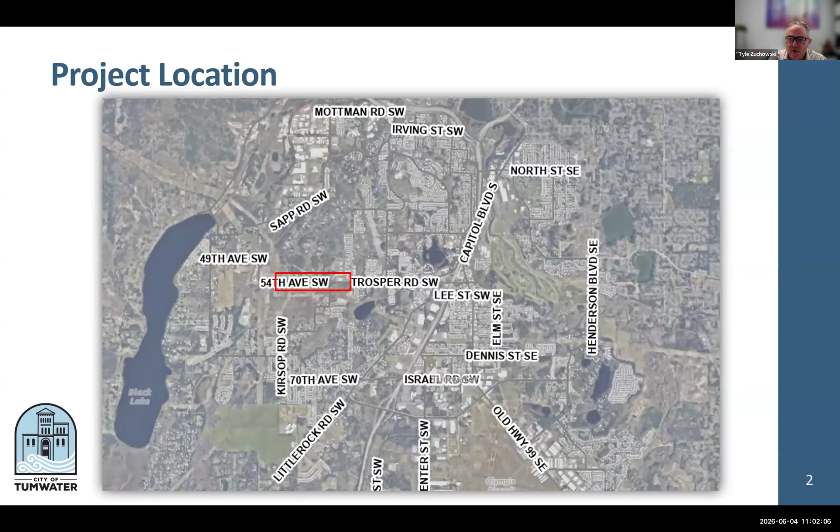I'll provide just a quick background on the project. It's located along Trosper Road and 54th. I'll remind you that I presented to the committee back in April seeking authorization from the council to accept the low interest loan in the amount of $5,250,000 from the Department of Ecology. I will note that all that paperwork has been submitted and approved, and the funds are available for that project.

So for the scope of the project, the project would extend the existing sewer line from Lambskin west along Trosper, 54th, and as well as up Joppa Street.

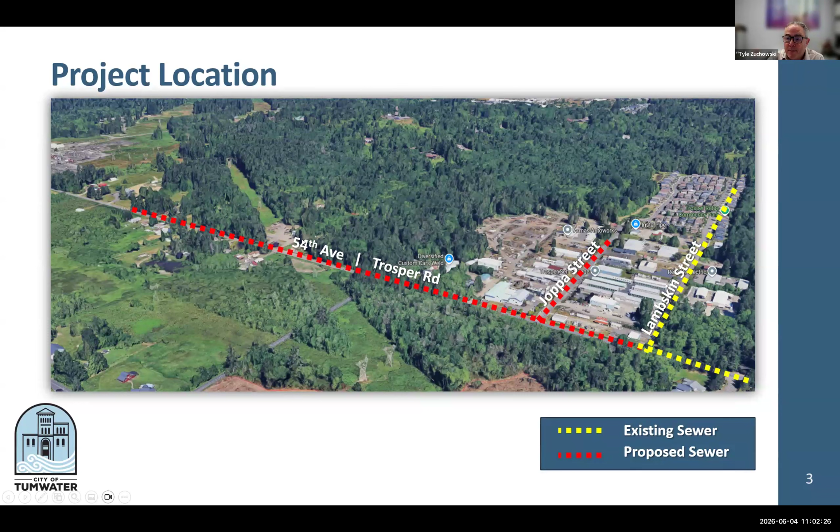And the primary driver for the project is water quality, through previous TMDL or total maximum daily load assessments, there have been water quality concerns identified with elevated levels of fecal coliform and total nitrogen. So we want to protect and improve localized groundwater in that area. We'll also use this project as a case study to help facilitate the development of the program and policies for the septic to sewer conversion program for the city. The council will be brought information as we continue to develop those, and this is used as a case study to help facilitate that process.

And with this particular project, we anticipate that there'll be 32 parcels that will now have the ability or sewer available to them.

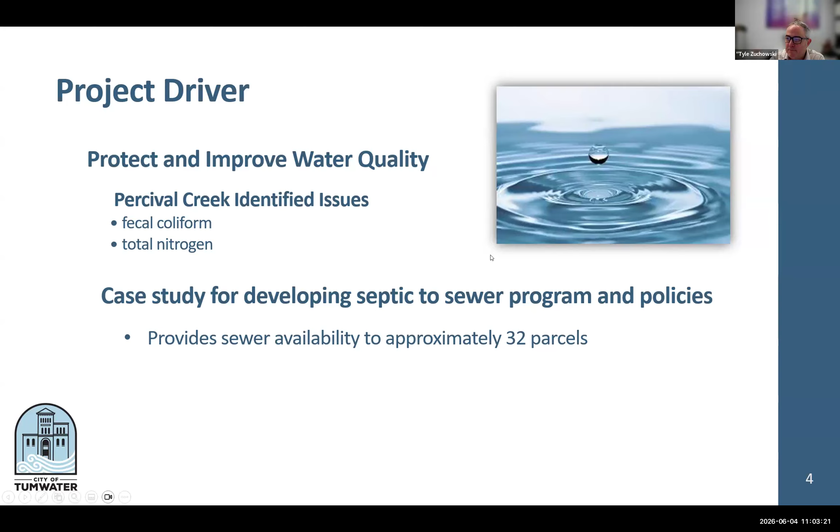So for this effort, we went out for a formal request for qualifications, and we encouraged qualified firms to submit their statement of qualifications addressing: what the firm is, where they're located, what are the primary types of projects they do, who their project manager would be and project team, their specific approach to the proposed project, schedule and availability, team members, and a list of references and previous projects demonstrating their ability to complete the work. We received 7 statements of qualifications from 7 qualified firms.

So we had an internal committee developed, and each member ranked the statements of qualifications based on that criteria. We all got together and discussed that. Ultimately, we selected Gray and Osborne as the most qualified firm. There was consensus with that, so that was great. It was nice to see that we had so many interested parties, so that's helpful moving forward, knowing that we have quite a bank of qualified firms out there.

Gray and Osborne submitted a scope and fee. Transportation and engineering folks did a great job of working with them and negotiating on the fee, identifying potential opportunities to reduce cost. So the tasks include project management, data collection, utility coordination. We'll also do a pre-design report to solidify the scope of work for the project, which will include getting stakeholders together to agree upon what that is. It will also include an updated cost estimate so that we can better understand the total project costs.

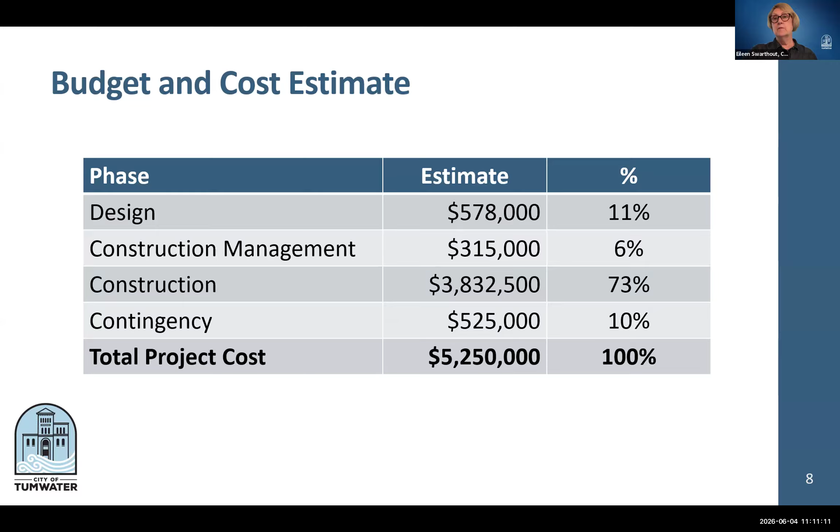Right, okay, I appreciate that. Thank you. The only other question I had was if we could go back to the map that showed where the route is going to go, how far down it goes. Does it go in front of the property that we're having an issue with right now, correct? Or does it?

Depending on which property it abuts, does it go past it? Yes. So are the red dots right, or the yellow dots? If it's the same property on the corner there, that is an existing sanitary sewer system, so there's already sewer at that location. So there's already water and sewer, but those structures aren't connected, correct? Correct. Okay, so that already exists.

So anything in red is what we're building, correct? Correct. Okay, got it. All right, just wanted to confirm.

I just want to point out too that the loan is the project budget. With the pre-design report we'll conduct with Gray and Osborne, that will help identify the extent of the project itself so that we can stay within the budget. So if we don't extend as far west, we'll match the project with the funds that we have available.

But we will get up Joppa and extend along Trosper, you said. Okay, yeah, that's our main goal. Okay, good to know. Thank you.

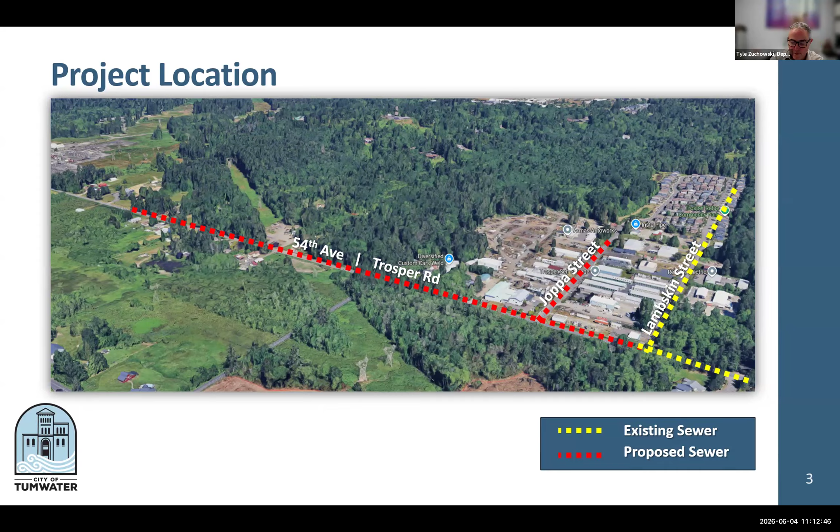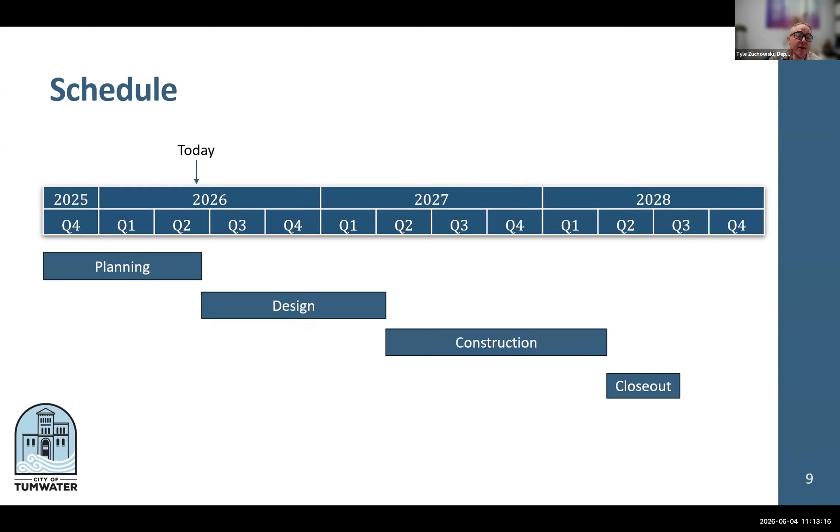All right, so again, hopeful to have this project under construction starting next summer. There are some identified high groundwater areas in there, so the hope is to get some of that work done prior to the winter season. But I think we're on a good pace right now, and look forward and hopeful that the committee is in favor of moving forward with Gray and Osborne.

With that, we would hope the committee would place a professional services contract with Gray and Osborne for the design of the Trosper Sewer Extension Project on the June 16th, 2026 City Council consent calendar with a recommendation to approve. I'll take any additional questions.

Any questions? Councilmember Van Holtz? I don't. In fact, I just got off of a call with the city of Tacoma for a sewer replacement project, so I feel like this is just my day. Okay.

City administrator, my only, not concerned, but just to show the city a picture of our loans. So this 5 million, and to just capture them all somewhere, so it's easily digestible, what it looks like for 15 years, what it looks like for 30 years.

That's a great point, Councilmember Jefferson. We currently don't have any debt, so right now there's nothing to show. But as we start to look at these projects, particularly when we do the financial analysis, full disclosure, we have a debt package we're working on right now that would consider some property acquisitions as well as the city hall facility as well as T2. So that's a debt package we're working on that would include the general fund.

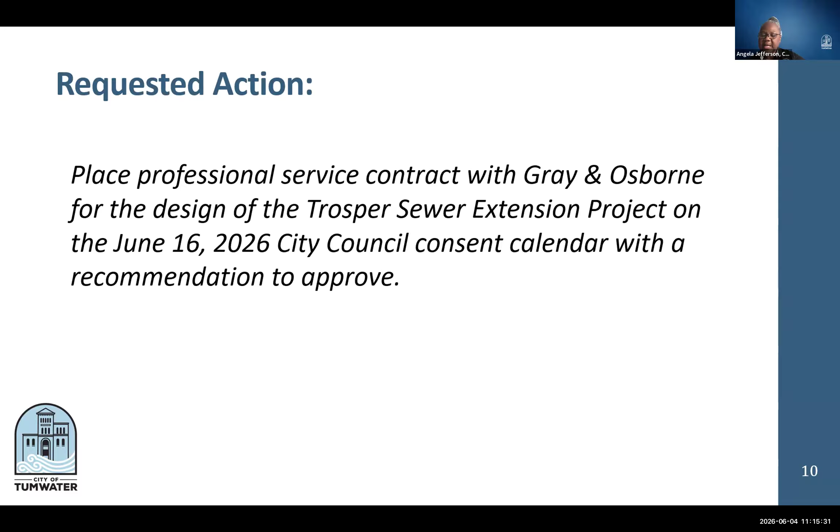Next, let's discuss the service provider agreement amendment number 2 with RH2 Engineering Incorporated for the Southeast Water Reservoir Design Project, Transportation and Engineering Department.

Okay, good morning, can everyone hear me okay? Yes, all right. Can you see the screen? All right, great, thank you. Hey, good morning, Chairperson, members of the council and committee.

My name is Jeff Query, Project Manager, Engineer 3 for the city's Transportation and Engineering Department, and I'm here today to present amendment number 2 for the City of Tumwater's Southeast Reservoir Project. To give you a quick refresher on the project itself, this involves the construction of a new 3 million gallon water reservoir off of 93rd Avenue near the southern city limits. This critical infrastructure will serve the city's 350 pressure zone water distribution system. As you know, Tumwater is growing, and this reservoir will provide vital water capacity for both domestic and commercial use.

So I just got a note passed to me there. There we go. Okay.

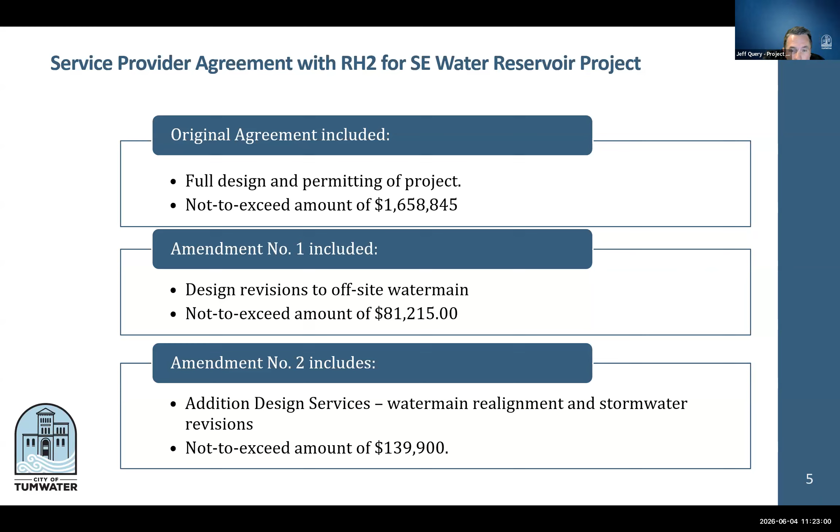So looking ahead, we anticipate completing final designs and having a bid-ready package by the end of this year, December 26, with construction bidding taking place in spring 27 and construction kicking off next summer. So with that, I respectfully request the Public Works Committee place the service provider agreement number 2 with RH2 Engineering for the Southeast Water Reservoir Design Project on the June 16th, 2026 City Council consent calendar with a recommendation to approve and authorize the mayor to sign. I'm happy to open the floor to any questions anyone may have.

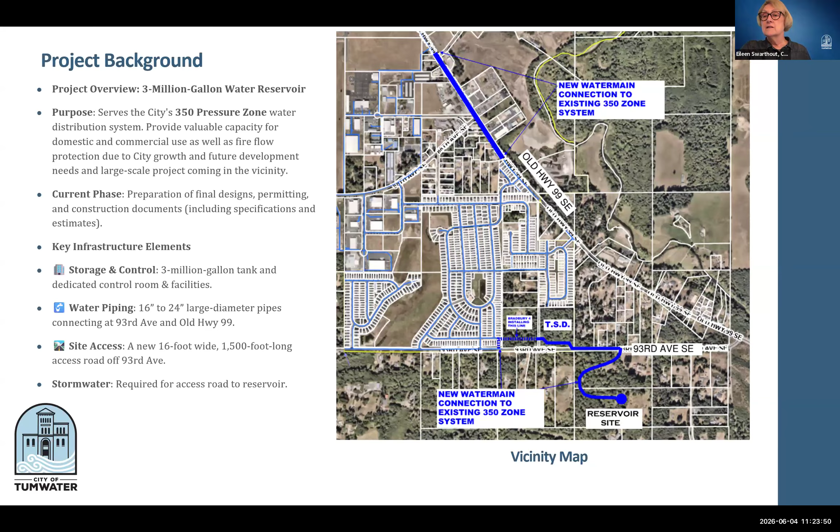Can we go back, Eileen, to that picture, please? And then how about that one too? Okay, so in a nutshell, go back to the main one, the other one you had up before. That one. So instead of going on 93rd on our side of the road, we're going to go on the other side, the Tumwater side, the Tumwater School District side. So we'll be running the line down there.

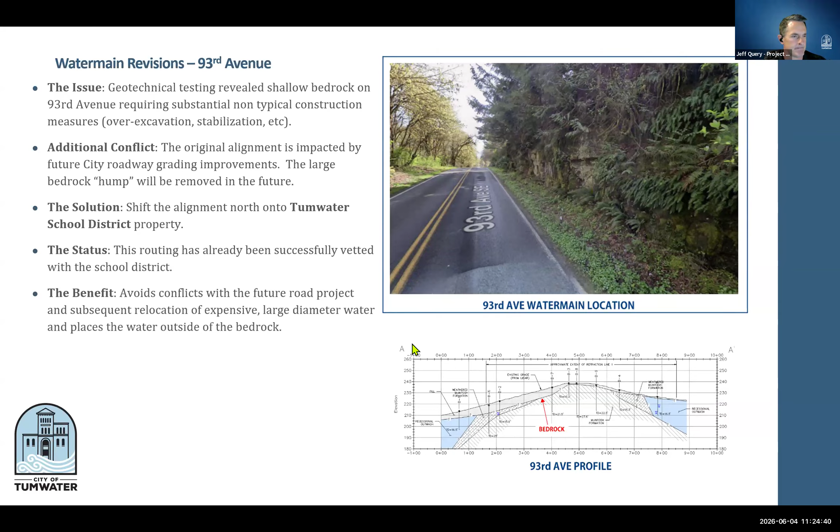That's correct. So I have a couple questions, also about the road we're punching through. We had some concerns before about how long that road is and how many trees need to be taken out. So now I'm wondering about the impact. It looks like you're going to have to do catch basins rather than having it just flow naturally. Is that what they're going to be? Can you go back to that map? So that means even more tree removal. What will that look like? We were really concerned about how much was going to be taken out of there.

So RH2's had their tree surveyor out there. We've identified heritage trees, and we're preserving as many trees as possible on the site. Part of this alignment included preservation of as many trees as possible. This site also sits quite a ways off of the main road, but we do have just the 40-foot easement through private property to get up to our property. So this is kind of the alignment we landed on in order to achieve all the goals.

Yeah, I remember that, having to snake it through the forest. It's just, now that we had our canopy briefing the other day about needing to preserve trees, and you just brought up heritage trees, it makes me realize that heritage trees are tough to replace if we have to remove them. Those are being retained, we aren't touching any of those. I'd be happy to follow up with you separately if you have more detailed questions. I could show you what we have going on in more detail related to trees on this site, Eileen.

Okay, that would be nice, appreciate that. And then the only other thing was flooding that's been off of 93rd before, that whole ditch district and stuff like that - this hopefully alleviates that. Yes, very sensitive for sure. So are you guys taking issues with flooding into account, extensively? Yeah, nothing so far.

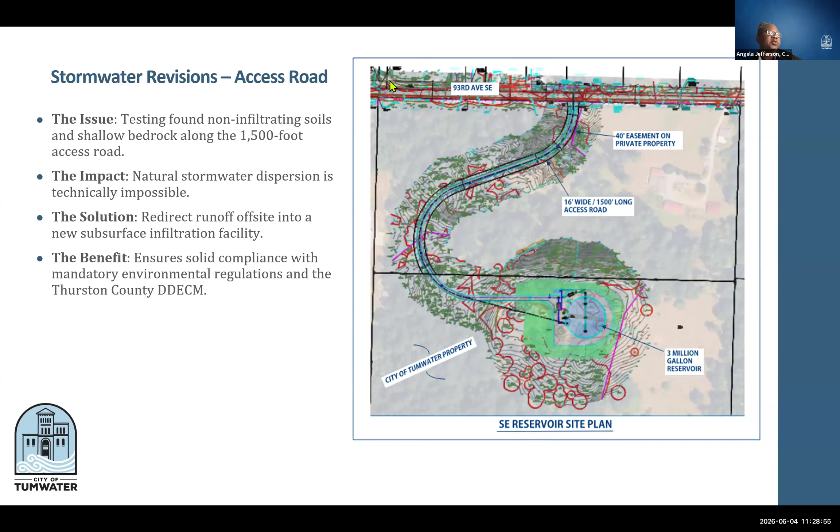Since there are no other questions, we have a recommended action to place the service provider agreement number 2 with RH2 Engineering Incorporated for the Southeast Water Reservoir Design Project on the June 16, 2026 City Council consent calendar, with a recommendation to approve and authorize the mayor to sign.

So move. Is there a second? All in favor say aye. Aye. Motion passes.

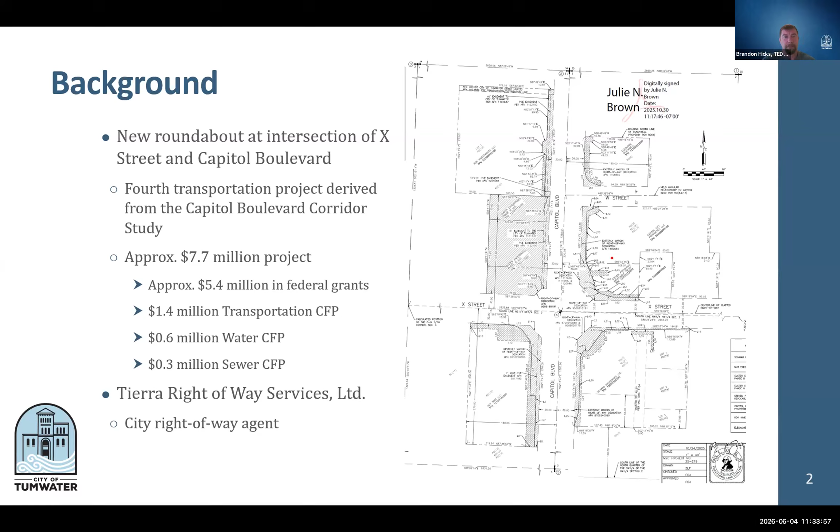For sort of describing why we're at amendment number 3, well, really what this is doing is increasing the current not-to-exceed amount in the consultant agreement from $184,220 up to $226,490.

I have a lot of the reasons, and these aren't even all of them on the screen there. But not wanting to read off every single one, I'd say the most notable struggles to date have been that it's been very difficult to relocate one of the properties in this project.

There is a full relocation of one of the businesses. It's been very difficult because there isn't a lot of market availability. There's been substantial effort for our right-of-way consultant to work with the property owner, and there has been some success—they have actually found and acquired another property.

They're working through some permitting struggles with Thurston County because it's not located in Tumwater. We were first hoping to find them a location in Tumwater, but there wasn't any that really met what they were looking for. They found a site they really like in Thurston County, sort of in that area between Olympia and Lacey where the city limits don't quite meet, off of Martin Way, I think—don't quote me on that.

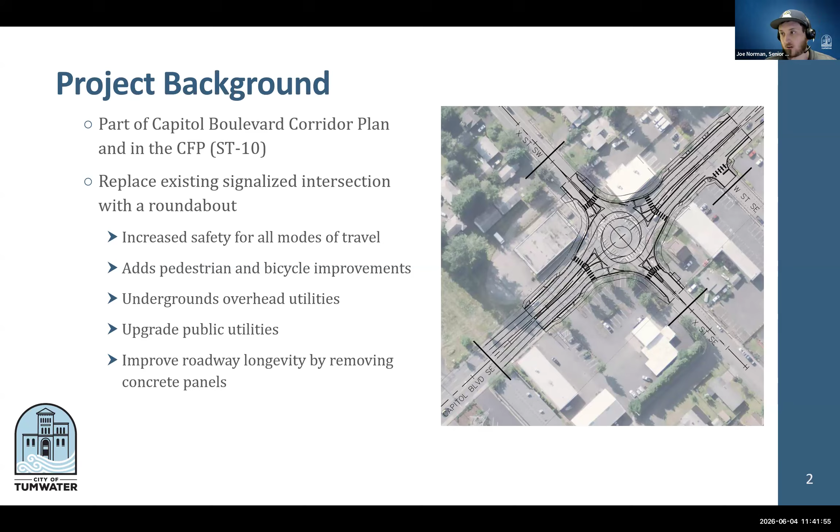We are replacing a signalized intersection with a roundabout, which aims to increase safety for all modes of travel. It'll add additional pedestrian and bicycle improvements. We'll be undergrounding our overhead utilities, upgrading our public utilities—water, sewer, and stormwater systems—and improving our roadway longevity by removing the underground concrete panels.

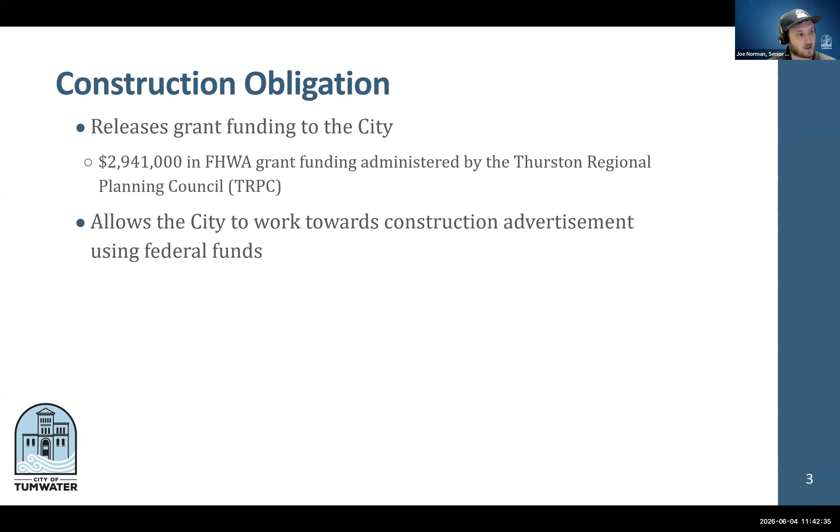The construction obligation portion is paperwork in order to release our grant funds that were administered by the Thurston Regional Planning Council, their FHWA grant funds. We have $2,941,000 that we secured for construction, and getting this construction obligation will allow us to move forward towards construction of the project.

So fiscal notes: our construction estimate is right around $4.9 million currently. The grant funds for the project to date have totaled $5,373,000 for the entire project, and that includes the $2,941,000 we're trying to get released upon acceptance of the construction obligation documents. The remaining funding, Brandon actually had better information than me to share, is from the transportation CFP and the water and sewer funds.

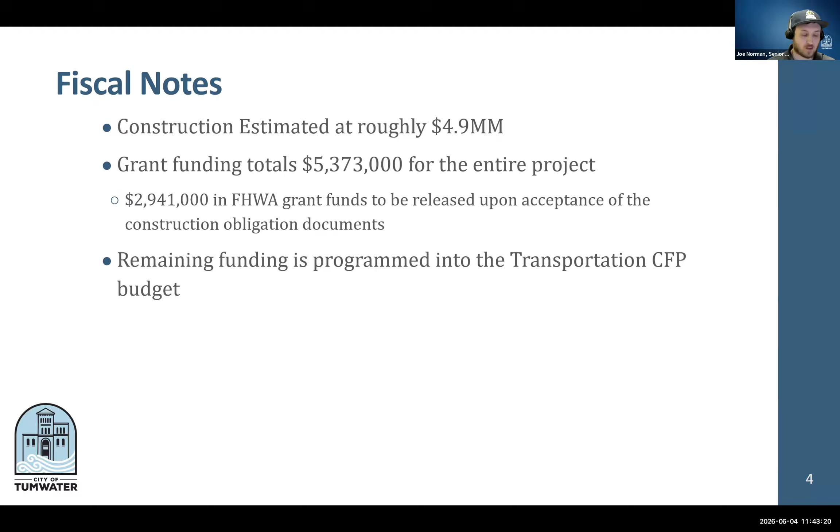Short and sweet—are there any other questions on what we're asking for here? It sounds like you are correct, Joe. Short and sweet. Oh, go ahead. Sorry, I ruined it, huh?

You're good. So as part of this funding, is public outreach going to be a part of it? We've gotten a few emails about the roundabout and people's fears, so I'm just wondering if we have public engagement as part of this construction.

So definitely we'll have a lot of communication with construction. Our communications team has ramped up the amount of effort we do to keep the public informed about construction efforts. In addition, we've been working with the public in general, and specifically the property owners along Capitol Boulevard corridor, for I want to say it's 12 years, on multiple occasions through the original corridor plan, feasibility, and then the whole design project.

So all of the business owners that are impacted here are very well aware of the project—it's been a part of their lives for over a decade. I think there's only one newer property owner that it was kind of new to them, but we've been able to inform them pretty well through right of way. Construction communication efforts are honestly second to none right now for the region, so yeah, we'll definitely keep everybody well informed.

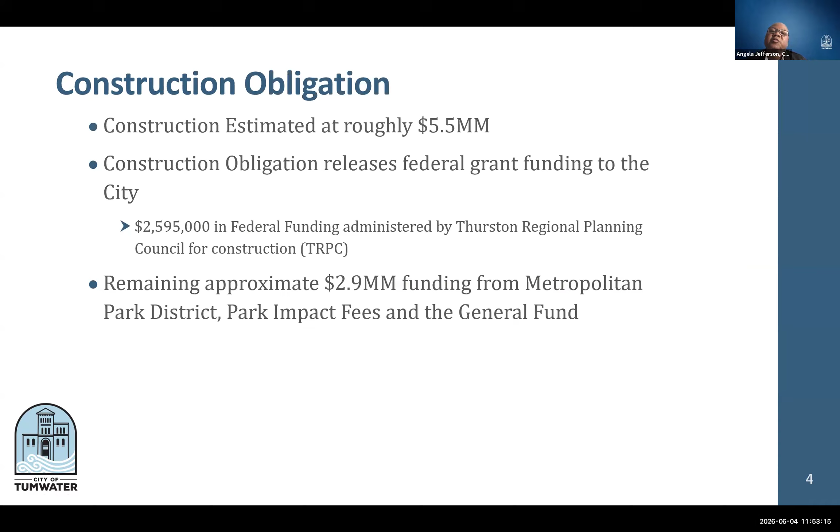Yes, can you go back to the previous slide that showed the trail where it said someone else was responsible for a portion of it? Yes. Trail Segment B has been designed as part of the Craft District, but it will be constructed by the city. So there's that little subpart of Segment B that's already designed, but would still need to be constructed, likely as part of Segment B. Okay, so for now, this is just Segment C we're talking about beginning.

Correct. And do you have a sense of when the entire thing, or at least Segment B, might be completed? We have a service provider agreement for the design of the remaining segments that either haven't been built, along with Segment C. So we have that agreement for the design, but I would say we haven't entirely landed on which part of the trail would be constructed next. One of our next steps is really to pick up the design of these remaining segments, but as far as timing on which one comes next, I think we're still in kind of a decision-making process.

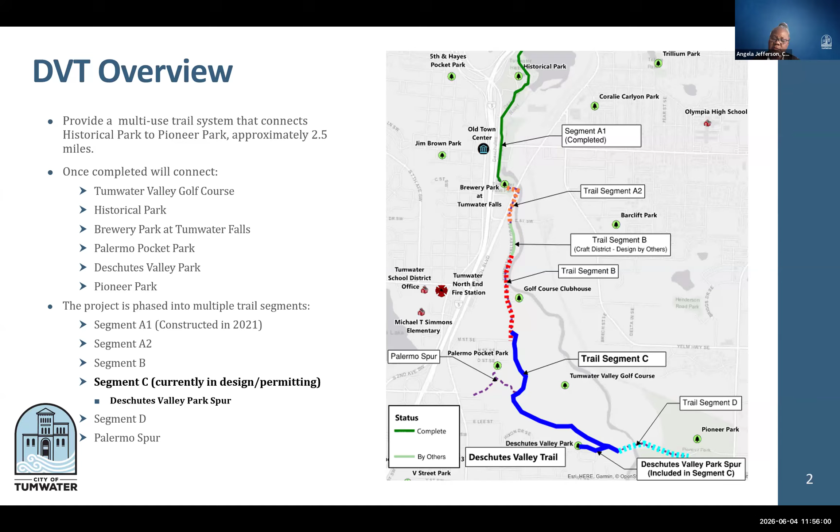Okay, very exciting news for our residents. Again, this would be something that our communications manager can give our residents an update about, because we're slowly approaching it. So I'm excited about this.

Absolutely, and this isn't just a trail when you look at it. It's 2.5 miles, but it connects existing bike and pedestrian facilities that go all the way up to Capitol Lake, and then connects to Henderson Boulevard, where we've already got wide shoulders and some bike lanes. We also have another project in the transportation CFP to widen the bridge on Henderson Boulevard, which is going to be the last bottleneck, or build a sister shared-use path bridge. So we're getting close to having some really major transportation corridors connected.

Yes, and this is going to impact our tourism and movements in Tumwater and access to our craft district, making it a more active community, which we've been talking about when it comes to transportation. Great work. Thank you.

Any other comments, my fellow teammates, council members? Nope. With that, can I have a motion, please?

I move to place the project prospectus with the Washington State Department of Transportation for the Deschutes Valley Trail Project on the June 16, 2026 City Council consent calendar, with a recommendation to approve and authorize the mayor to sign the prospectus. I'll second. All in favor, say aye.